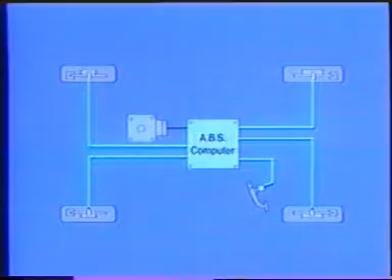which detects the speed of the wheels at the time of braking, it sizes up road conditions and sends signals which put the actuator into operation. The actuator controls the hydraulic pressure in the disc brake cylinders of each wheel by signals from the computer.

The warning light comes on when something is malfunctioning in the electrical system. This warning light can also be used for diagnosing the ABS system.

We have just described the component layout for the front-wheel drive Celica. In the four-wheel drive Celica shown here, the computer and actuator are under the rear seat. In this model, there is a deceleration sensor at the rear side of the computer.

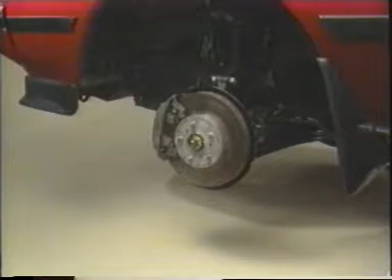Now, we will take a look at the actual construction of the system and see how it works. Each steering knuckle is provided with a speed sensor, and each axle hub is provided with a serrated rotor.

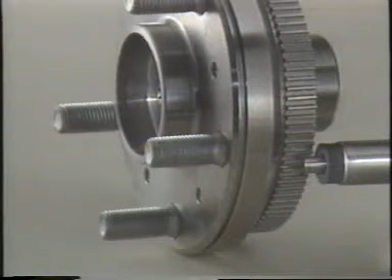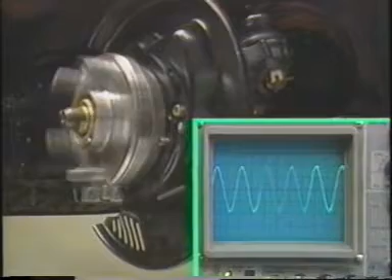The speed sensor consists of a permanent magnet and a coil. As the serrated rotor revolves, the amount of magnetic flux produced by the permanent magnet fluctuates, causing an alternating electric current in the coil. The frequency of this alternating current is in proportion to the rotational speed of the axle hub. So with this arrangement, it is possible to sense the speed of each wheel.

Each rear speed sensor is fixed to a parking brake plate, and a serrated rotor is provided on each rear axle hub.

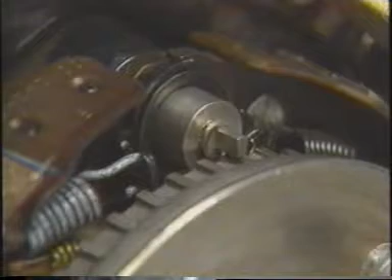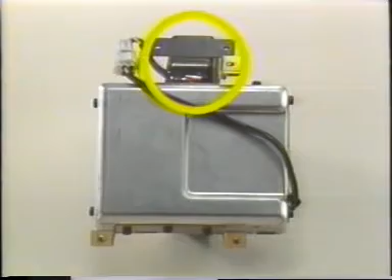This is the deceleration sensor used on four-wheel drive vehicles. Unlike the front-wheel drive vehicle on which the rear wheels are not driven, the four-wheel drive vehicle has special characteristics during braking because all four wheels are being driven. For this reason, a deceleration sensor is provided to detect vehicle deceleration.

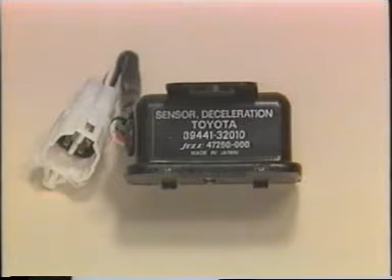Inside the deceleration sensor are two light-emitting diodes, or LEDs, on one side, and two phototransistors facing them on the other side. A pendulum is situated between the LEDs and phototransistors. The plate of the pendulum has slits and is called a slit plate. This slit plate swings at the time of braking, and the amount of the swing causes the phototransistors to switch on or off.

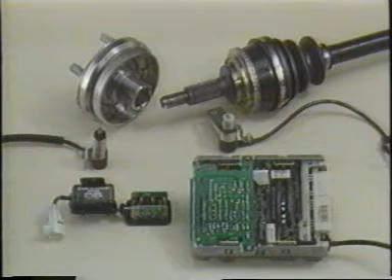Thus, the deceleration sensor detects a drop in vehicle speed during braking and sends this information to the ABS computer. In this way, signals from the speed sensors and deceleration sensor help the computer to make a more accurate appraisal of road conditions.

This is the ABS computer. It performs the following functions. First, its basic function is to control the wheel speed according to the road conditions.

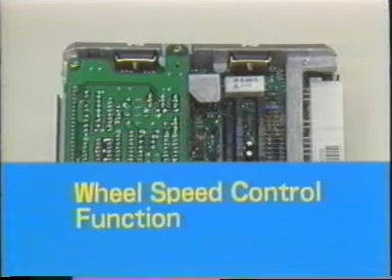An initial check function enables the actuator to check out its own electrical system. A further function is the diagnosis of malfunctions. Finally, there is what is called a fail-safe function, which assures normal braking function if some failure occurs in the signaling system to the computer.

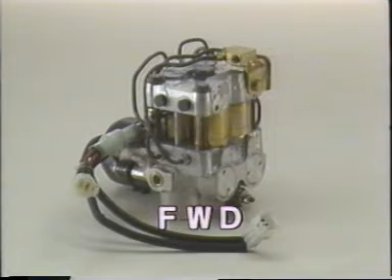The actuator reduces or increases the fluid pressure in the disc brake cylinders according to signals from the computer. In this way, it controls the speed of the wheels.

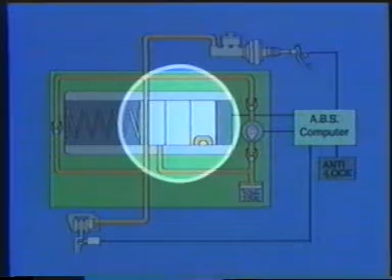The actuator is composed of the following components: three-position solenoid valves, which change the mode of brake fluid pressure by holding, reducing, or increasing the pressure in the disc brake cylinder; and a pressure reduction unit consisting of a reservoir for brake fluid returning from the disc brake cylinder, and a pump for returning the fluid in the reservoir to the master cylinder. The pump is driven by a motor and revolves continuously while the ABS is operating.

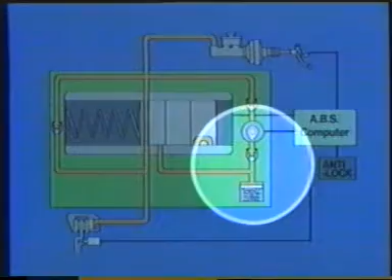As an example, let's take a look at the operation of the brake system of one front wheel.

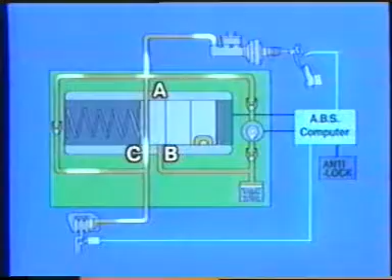Under normal braking conditions, when slip between the tire and the road is rare, the anti-lock brake system does not operate. In this situation, the three-position solenoid valve does not operate. Port A remains open and port B remains closed. Brake fluid pressure is applied to the disc brake cylinder through port C. When the brake pedal is released, the brake fluid returns to the master cylinder from port C through port A and check valve number 3, so that no fluid pressure remains in the disc brake cylinder.

However, when slip between the tire and road increases greatly, a signal from the ABS computer causes the three-position solenoid to operate. Let's see how the reducing, holding, and increasing modes of the three-position solenoid valve operate.

First, the holding mode. When the three-position solenoid coil receives about 2 amperes of electric current, the solenoid valve moves to the central position. At this time, port A closes and cuts off the fluid pressure from the master cylinder. At the same time, even though the pump motor is turning, there is no drop in pressure because port B is also closed. In this way, the pressure in the disc brake cylinder is kept the same.

Next, the pressure reduction mode. When the three-position solenoid coil receives about 5 amperes of electric current, the solenoid valve moves to the position shown here. At this time, port A is closed, cutting off fluid pressure from the master cylinder. At the same time, port B is open, and the disc brake cylinder fluid is sent to the reservoir through port C. The pump motor operates on a signal from the computer so that the fluid stored in the reservoir is returned to the master cylinder. This results in a drop in disc brake cylinder hydraulic pressure.

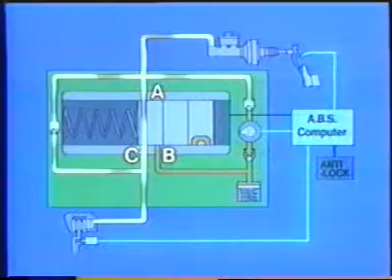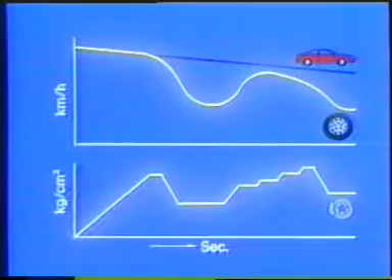This graph shows the connection between vehicle speed and the speed of one wheel, and also the change in fluid pressure in the disc brake cylinder of that wheel when the ABS is operating. When the speed of the wheel drops quickly due to sudden application of the brake, the ABS computer starts the actuator and reduces the fluid pressure in the disc brake cylinder. Then, as the speed of the wheel increases, brief switches between holding and increasing modes increase the fluid pressure of the disc brake cylinder a little at a time. By controlling the speed of the wheel in this way, wheel lock is prevented. Switching from one mode to another many times in a very short time allows the car to slow down without the wheels locking.

The anti-lock braking system uses a 3-channel control method by controlling the front left and right wheels independently and the rear wheels together.

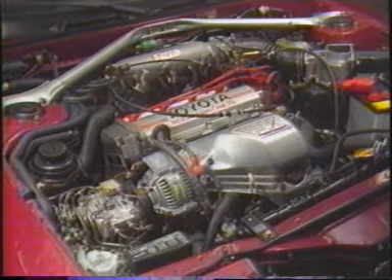Next, let's take a look at the service points of the anti-lock brake system. The ABS computer has the following functions.

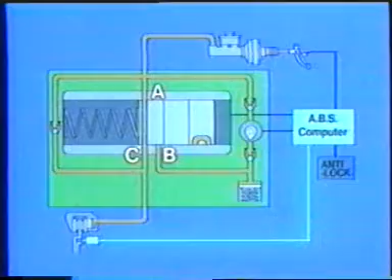When the vehicle is traveling at more than 6 kilometers per hour and the stop lamp switch is off, the initial check function activates the 4 three-position solenoids and pump motor in turn in a self-diagnosis. During this initial check, you will hear the sound of the actuator motor, but this is quite normal.

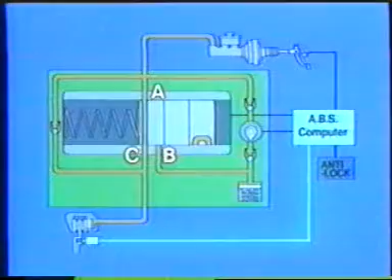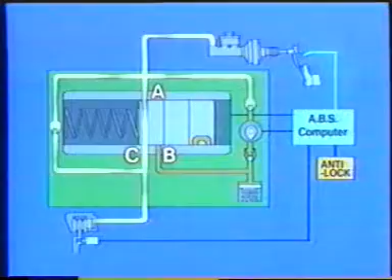When there is a malfunction in the electrical circuit of the ABS, the computer, which has a fail-safe function, will stop sending control signals to the actuator. In this condition, the ABS will not operate, but the normal braking system still functions.

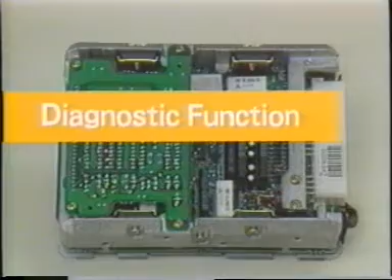When something goes wrong in the electrical circuit of the ABS, the anti-lock warning light in the combination meter will light up to inform the driver about it.

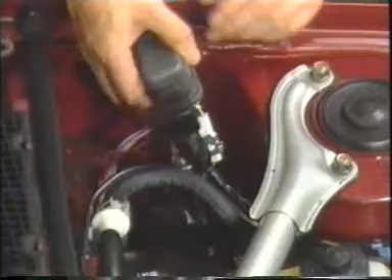To check into this, disconnect the check connector and turn the ignition switch on. When this is done, the anti-lock warning light will begin to blink. The number of times that the warning light comes on will give you the code number. Let us now observe an actual lamp blinking pattern.

The number of times that the lamp blinks every half second after a 4-second pause indicates the first digit of the code. The number of blinks every half second after a 1.5 second pause indicates the second digit of the code.

In this case, the lamp blinked 3 times, then twice, so the blinking pattern indicates code number 32.

Should there be a malfunction in more than one place, the indication of code numbers will start with the smallest code number. When this happens, indication of the second code number will begin after a pause of 2.5 seconds. This warning light blinking pattern will be repeated continuously.

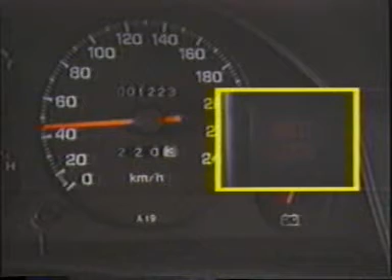If there is a malfunction, the warning light will come on and stay on.

Three, stop the car and check the blinking of the warning light. At this time, by switching the ignition switch off or switching the parking brake switch on, the results of the speed sensor check will disappear from the memory, and the normal diagnostic code should be indicated.

When something is wrong, decipher the code number by the blinking pattern. For example, if the light blinks 7 times at intervals of half a second, and then lights up twice after 1.5 seconds, the code number is 72. After 4 seconds, that same code number will be repeated.

With this, all diagnosis of speed sensors is finished. Now you can reconnect the check connector. Next, let's see what is done in the case of a 4-wheel drive vehicle. Step 1. Turn the ignition switch on and check that the warning light goes off after 3 seconds. Step 2. Turn the ignition switch off. So far, this is the same as the front-wheel drive, isn't it?

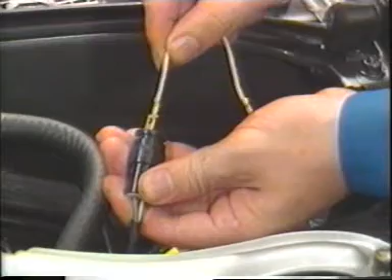Step 3. Short the TS connector in the engine compartment. Step 4. Next, do not depress the brake pedal, but pull on the parking brake instead and start the engine. Check that the warning light is blinking. With this, the mode for the speed sensor check has been set.

As with the front-wheel drive vehicle, we now do a road check in this condition. This road check is performed exactly as with the front-wheel drive vehicle to let the computer make the diagnosis. Check the output voltage level at between 4 and 6 kilometers per hour, and the output voltage fluctuation at between 45 and 55 kilometers per hour.

If there is a malfunction, the warning light will come on and stay on. Stop the vehicle. Disconnect the check connector. And check the blinking of the warning light. For example, this code number 74 indicates, as you see here, that there is too much clearance between the rotor and speed sensor of the left rear wheel.

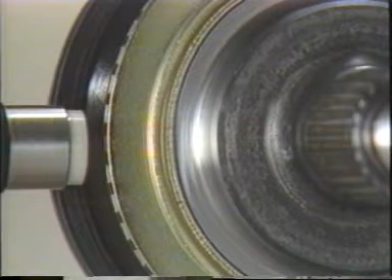When the diagnosis is finished, connect the check connector and remove the shorting pin from the TS connector and install the cap. With this, the malfunction code will be cleared from the memory. There is a deceleration sensor on the 4-wheel drive vehicle for detecting a drop in vehicle speed. Let's see how this deceleration sensor is checked.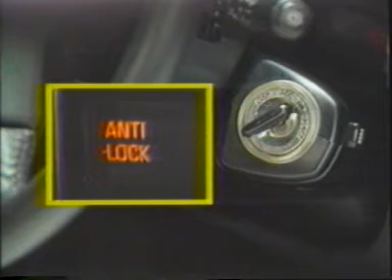Step 1. First, switch on the ignition and check that the warning light goes off after 3 seconds. Step 2. Turn the ignition switch off. Step 3. Short the TS connector in the engine compartment. Step 4. Pull the parking brake on and start the engine with the brake pedal depressed. If there is one blink every second, the deceleration test can be performed.

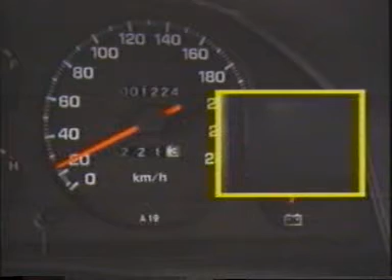First, a road test is performed to check whether or not the deceleration sensor is operating. 1. Drive the car at about 10 kilometers per hour and then lightly apply the brakes. Check that the warning light remains blinking. 2. At around 20 kilometers per hour, apply the brake a little more strongly. Check that the warning light is only on during braking. After the brake is released, the warning light re-blinks.

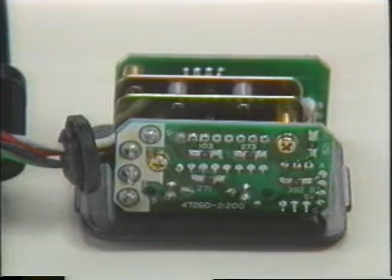3. At the same speed, apply the brake strongly. The warning light will change to fast blinking. We have confirmed that the deceleration sensor is functioning properly. Next, let's check the angle at which the deceleration sensor has been installed.

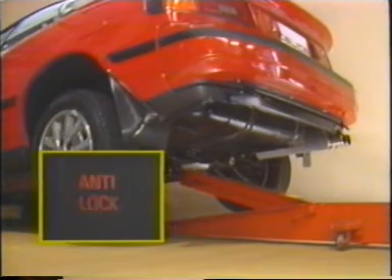1. Make sure that the vehicle is on a level floor and slowly jack up the rear to the height specified in the repair manual. Check that there is no change in the blinking of the warning light. 2. Gently jack down the rear end and check that there is no change in the blinking of the warning light.

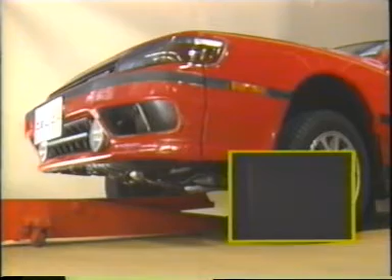3. Repeat this procedure for the front of the vehicle. If there is still no change in the blinking of the warning light, then the deceleration sensor is functioning properly. If there is a malfunction in the deceleration sensor, the pattern of the warning light will change.

This finishes the deceleration sensor check. Remove the short pins from the TS connector. During servicing work, be careful not to damage the ABS computer, speed sensors, serrated rotors, or deceleration sensor.

To check the functioning of the actuator, an actuator checker and sub-wire harnesses are used. But the actuator checker cannot be used to check all of the ABS system. In the case of a front-wheel drive vehicle, this checker is put into position in the following way. 1. First, the short sub-wire harness is connected to the actuator checker, and the long sub-wire harness is connected to the short sub-wire harness.

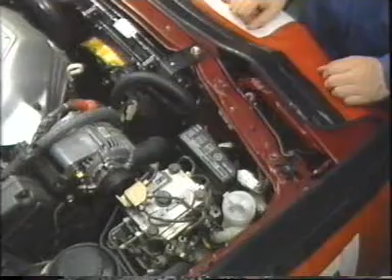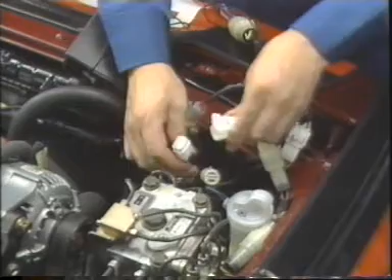2. Next, the connectors connected to the actuator are disconnected. 3. Then the connectors of the short sub-wire harness are connected to the connectors of the actuator and engine wire harness, and the ground cable is connected to the body. Next, the connector connected to the control relay is disconnected, and the connector of the long sub-wire harness is connected to the control relay.

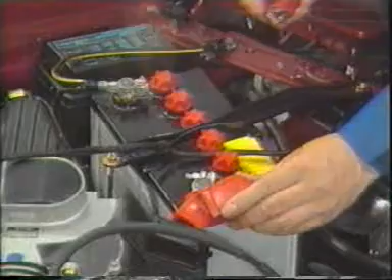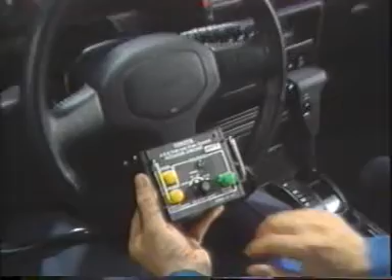4. Don't forget to connect the power supply cables of the actuator checker to the battery terminals. 5. Finally, sheet A, on which the layout of switches is written, is placed on top of the actuator checker. In the case of a front-wheel drive vehicle, the long sub-wire harness is not used.

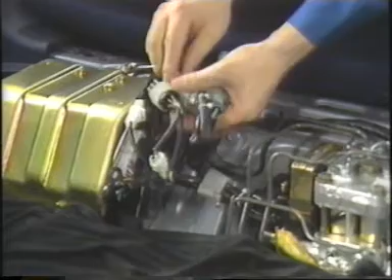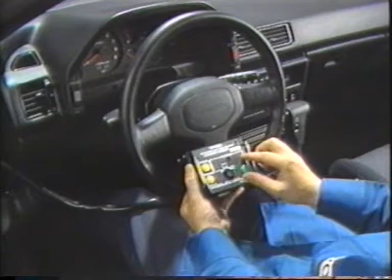1. All three connectors connected to the actuator situated under the back of the rear seat are disconnected. 2. The connectors of the actuator checker are now connected to the actuator. After this, it is the same as for a front-wheel drive vehicle. 3. Connect the power supply cables of the actuator checker to the battery terminals. 4. Sheet A, on which the operation is outlined, is placed on the actuator checker.

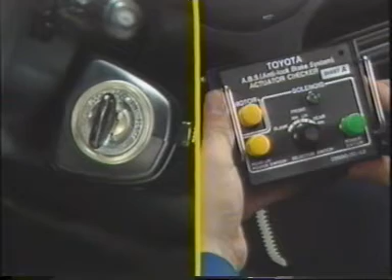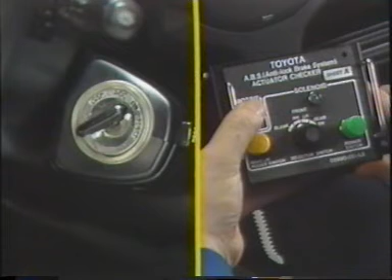Everything is ready, so let's start the actual check. 1. First start the engine and let it idle. 2. Set the selector switch for the disc brake cylinder being checked. 3. Press the motor switch for a few seconds. 4. Press the power switch while keeping the brake pedal depressed with a steady amount of pressure. It should not be possible to depress the brake pedal any further. Do not press the power switch for more than 10 seconds.

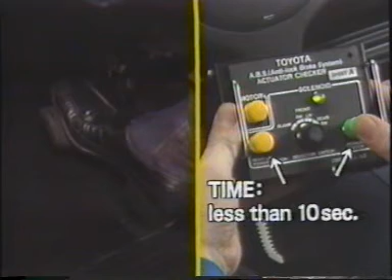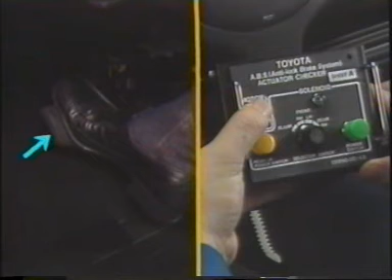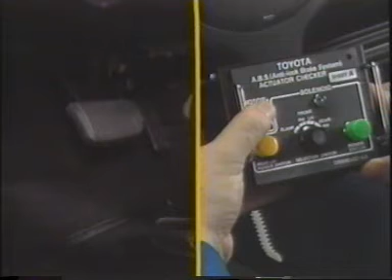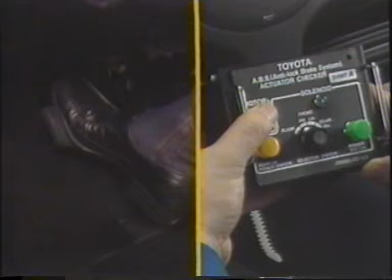5. Release the power switch and see if the brake pedal can be depressed any farther. 6. When the motor switch is pressed, the pedal returns. 7. Now release the brake pedal. 8. With the brake pedal released, press the motor switch for a few seconds. 9. Next, while keeping the brake pedal depressed with a steady amount of pressure for about 15 seconds, press the motor switch and check whether or not there is pulsation in the brake pedal.

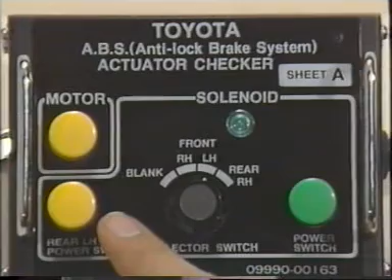Repeat these checks for the other disc brake cylinders. When the check is finished, remove the checker and reconnect all the connectors of the ABS, actuator, and control relay. When the actuator and relay connectors were disconnected, trouble in the solenoid relay was recorded in the memory of the computer, so the memory must now be cleared.

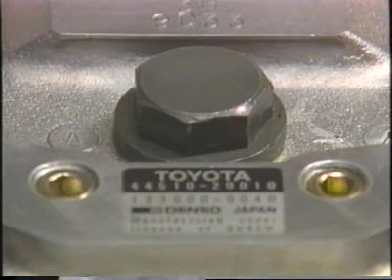Air bleeding on the ABS is performed in the same way as conventional brake systems, by bleeding the air from the actuator and brake lines. Also, as it is not possible to disassemble the ABS actuator, the actuator assembly must be replaced if some malfunction is found.

While the anti-lock system is functioning normally, the brake pedal may pulsate, and the vehicle body and steering wheel may vibrate. Do not take risks. Even though you have an anti-lock brake system, you must still keep a safe distance from the car in front of you. In fact, the braking distance of the anti-lock brake system may be longer than that of conventional brake systems. Always reduce speed when cornering and when roads are rough or covered with snow or gravel.

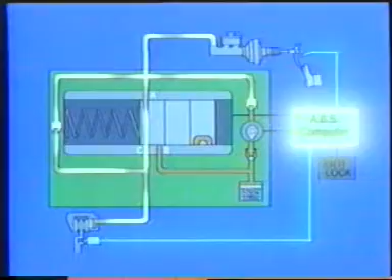The anti-lock brake system is a new mechanism that will be used more and more in the future to improve braking efficiency and maintain driving stability. We hope that you now understand what this anti-lock braking system is all about. We would like to take this opportunity to encourage you to become even more familiar with this system by thoroughly studying the service training information, new car features, and repair manuals.